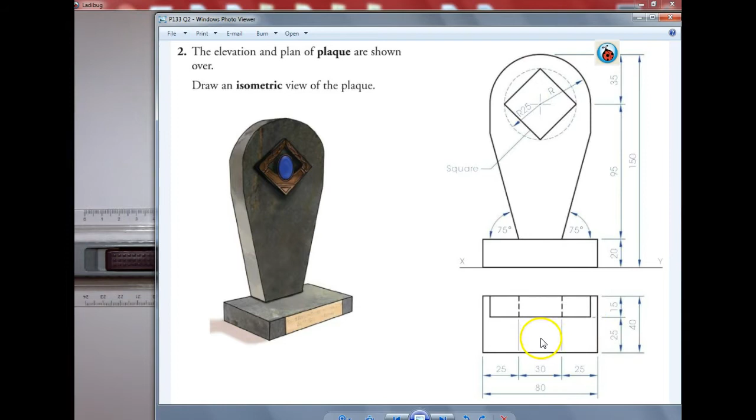Okay lads, so in this question we have a base, we're going to have an angled body then coming up, and this is going to come up to meet a semicircle, so quite a lot. So first thing I'd like you to do is I want you to draw the plan and the elevation on the left hand side of your page. This is just so we have it for measurements, and so I'm just going to make it a bit smaller.

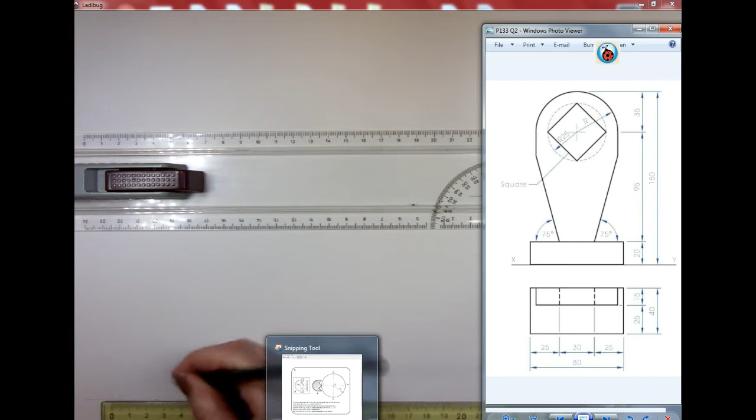So over here, start off my plan, and on my plan I have 25, 30 and 25. From each of those points we're going to go vertically up. I'm going to extend them up to the elevation because I will need them as well in the elevation. My thickness of my plan, I'm given a total of 40 and I have a 25 and a 15. So measure my 25 and my 15. From those 2 points we're going to go across. So I can darken in the outline of my plan now.

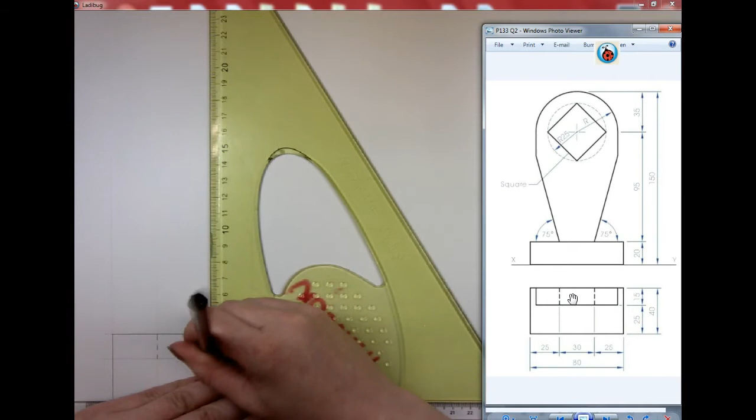Okay, now I'm not given this line here. In order to get that, I have to do my elevation, but I do have 2 hidden detail lines here. Obviously, just to recap, hidden detail means we can't see it, but it is there. Okay, so I'm going to do my XY line. Obviously, as we know, leave 1 centimeter to 2 centimeters of a gap for neatness.

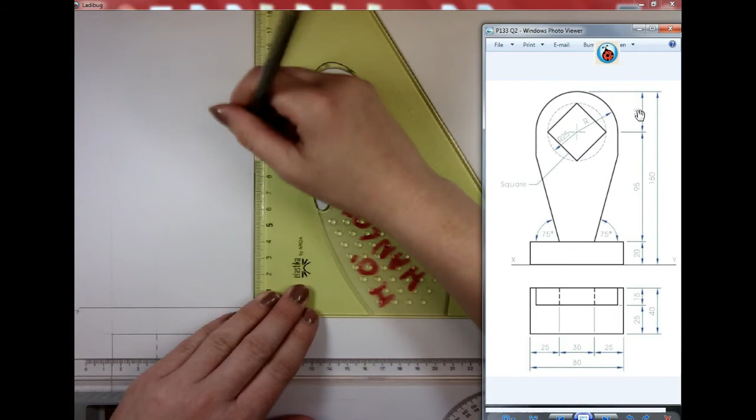And the heights I have in my elevation, I have a 20 and a 95. And I have a radius up here, which is going to be radius 35. So 20 and 95, and go horizontally across, horizontally across. For my base, I can just draw my base in lovely and dark.

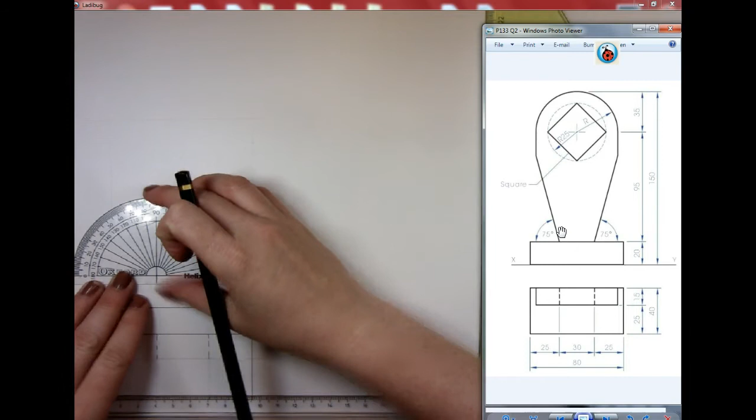And so first thing I'm told is I have an angle here of 75 degrees. Obviously, if you don't have a protractor, you can get 2 set squares, a 30 degrees and a 45 degrees, and that will give us 75. So I'm just going to line it up, 75. Once we have our dot, line it up, draw my angle. Same on the other side, we have our 75 degrees.

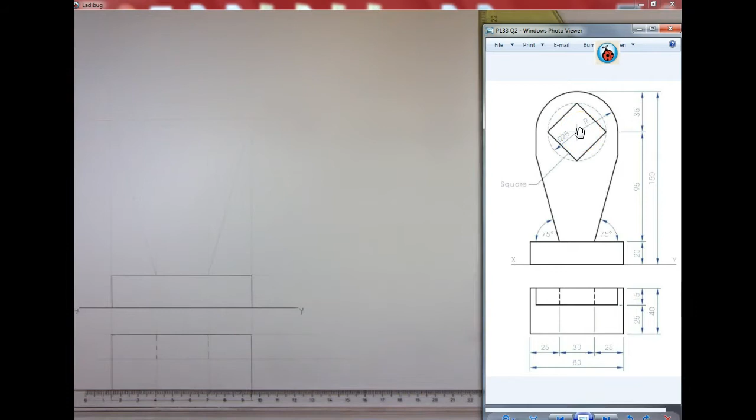Now, I'm now going to go straight up here to my radius 35 circle. My radius 35 is obviously going to be in the middle, so I'm just going to get my midpoint here and go straight up. Now, get my radius 35 on my compass, and from this point we're going to draw in my semicircle. Now, it's very important we do this bit next.

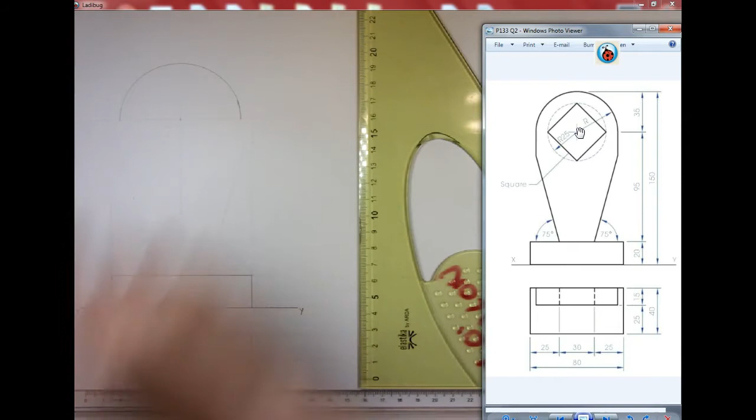Once I have this drawn, from these 2 points, I'm going to drop a vertical line straight down, and that there is the point where it cuts. Now we just draw horizontally across to show that we're in the same point. Lovely. So we can draw this nice and dark now.

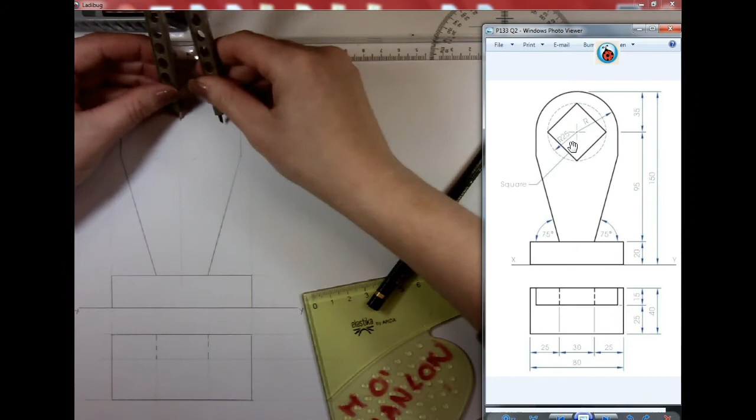Okay, next thing I need to do, lads, is using the same center point, I have a radius 25 circle. So getting my compass, I'm going to put 25 on my compass. Oh, sugar, apologies. That's, as we know, meant to be a light circle, not a dark circle, lads. So nice and light, please, because it's a construction circle. So, nice light circle, and as we see, we're going to use that for our square, which is inside it.

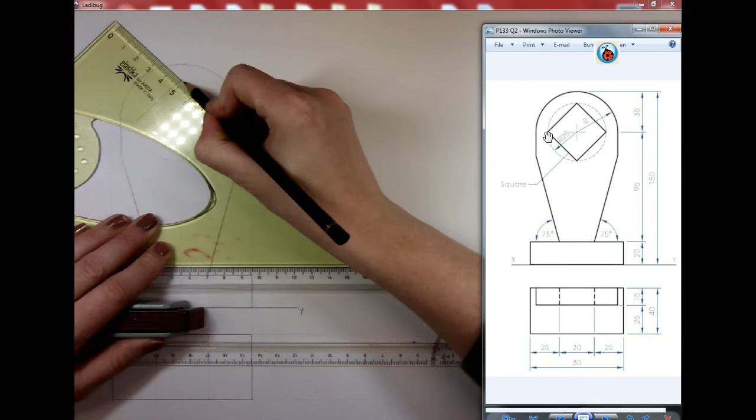So I'm just going to draw the vertical line so we can get to the top and the bottom. And using my 45 degree set square, we can draw the required square. Obviously, it's a square that's tilted at 45 degrees. Now, we just finally have to finish my elevation. My widest 2 points are these 2 points here, so we're going to bring them straight down. And same on this side, straight down. And drawing my line across. Lovely. So, we have our shape.

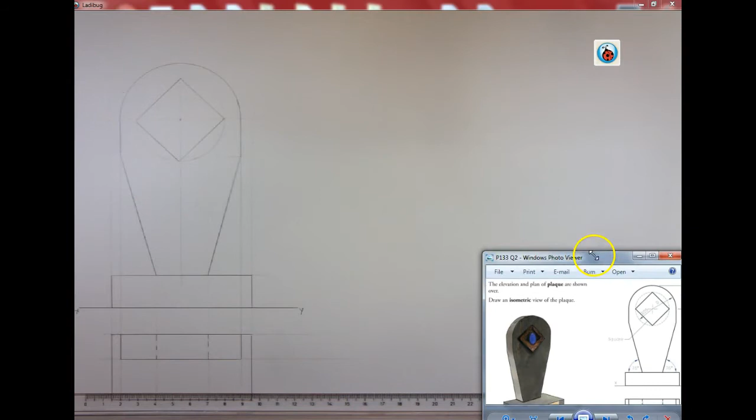The next thing we're going to do is we're going to get our 3D drawing. Now, my 3D drawing that I have to get, I'm just going to move this down here out of the way. I have a base first of all, so I'm going to start with the base there. Okay lads, so I'm going to start by constructing the base. Now, as we know from our plan, our base thickness is this thick and our width is this width. So we're going to start with our crow's foot.

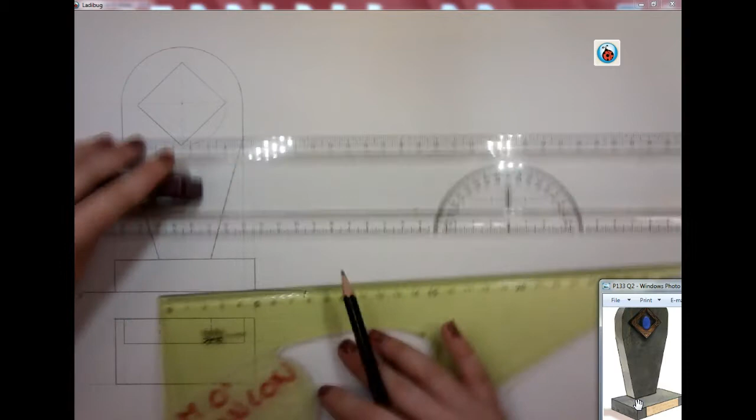So near the bottom of the page, we're going to draw our 30 degree line and a 30 degree line meeting it. And first and foremost, I'm going to get my compass, and I'm going to take my distance, my length of my plan, mark it off, and the width or thickness of my plan, and mark it off as well. So that gives me those 2 lovely points there.

Once I have those 2 points, I'm going to go back at 30 degrees, and by going back at 30 degrees, that's given me, I'm going to say, the top here, and I'm going to work downwards. In order to get the bottom part, from the 3 points here, I'm going to go down vertically. We don't need to draw a vertical line from this back corner because we won't actually see it, okay? There is a line obviously going from it, but we won't see it.

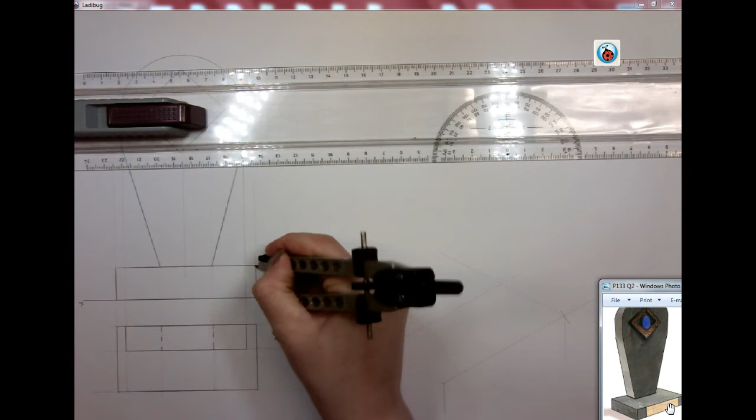My height is taken from my elevation. Mark it off. And once we have that marked off, we're going to join our dots together to get the bottom of the box there. Okay, I'm not going to darken in this yet because we don't know how much will go in dark.

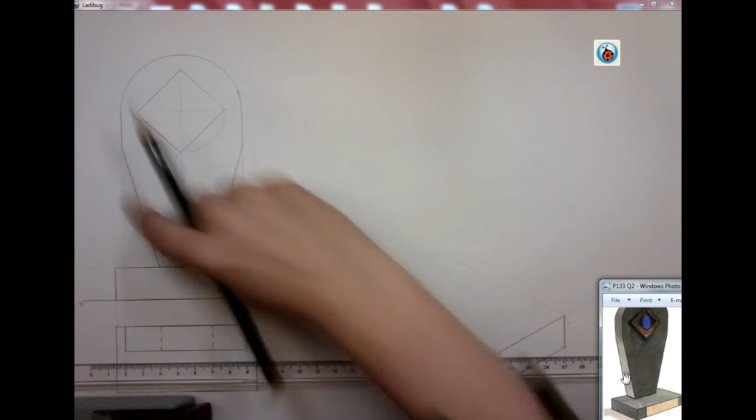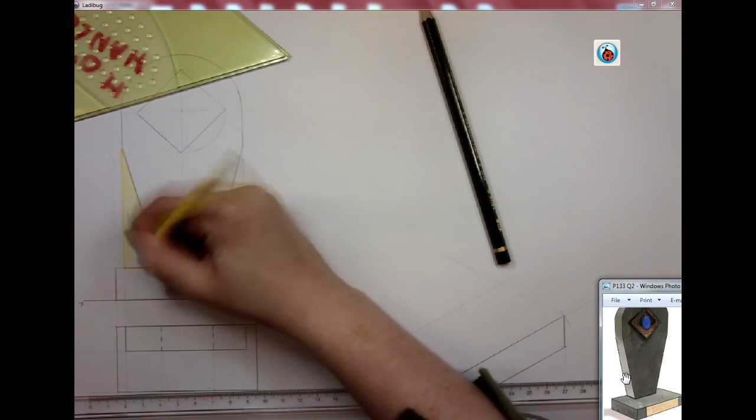Now, the next thing we have is we have an angle here. So we have to look at our angle and how we're going to solve it. So if we come up here to my elevation, I'm just going to put a triangle here where the angle is. So there's the height. That's the actual angle itself. And then we have a width here, which is that width. This is the triangle that gives us the angle. I'm just going to put a bit of colour into it here just so we can translate it over to the side view.

Now, I need to find that down here. Before I find that, I'm going to find this point. Now, it's very easy to find that point because this is the same as this. So if I take my plan and I take the distance from here to here using my compass and I mark it here, I'm going to go back at 30 degrees. And I know the length of that will be this length here. Now, what that gives me, lads, is this line, which essentially, if we look at the 3D, it's that little line that's just there, okay?

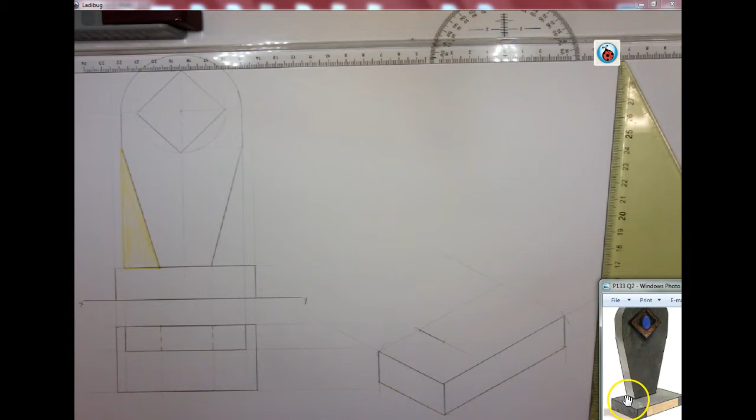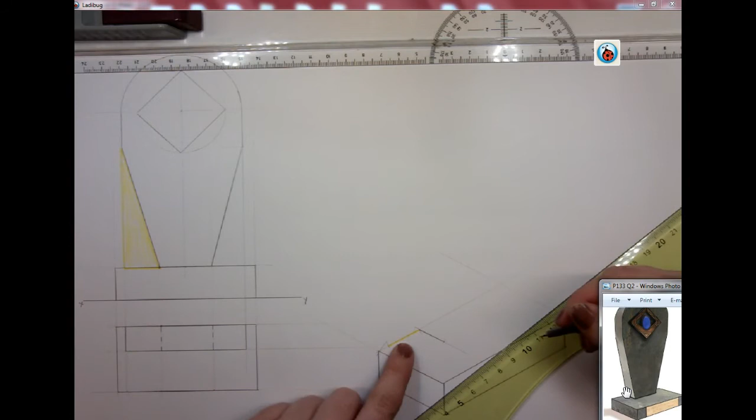So, from this point, I need to measure this distance. So, I'm going to take this distance here using my compass. So, I have that distance on my triangle, and I'm going to mark it here. And I know now that that yellow line is the same as this yellow line. As we see, the horizontal line becomes 30 degrees in isometric. From this point we have a vertical line going up. So from here we're also going to draw a vertical line going straight up.

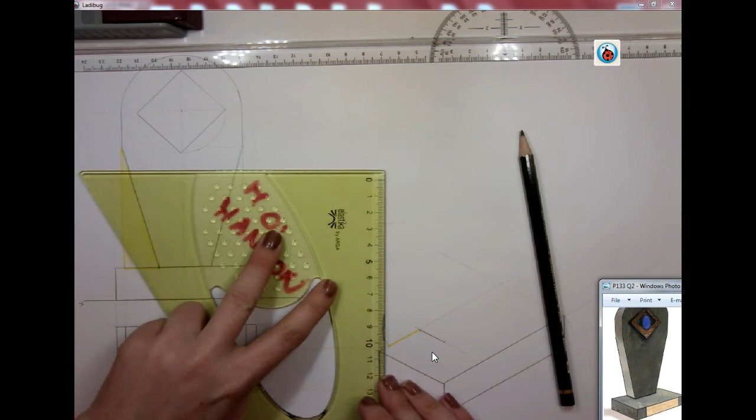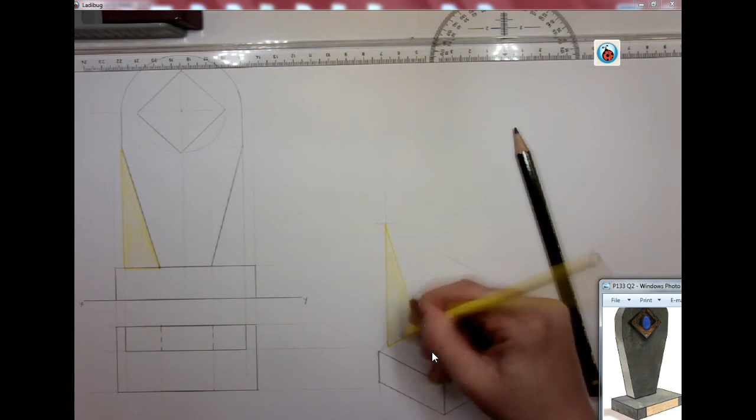Now in my elevation I can take the height of that and there's our height. Turn around here and mark it off in my 3D. So yet again we know this height is the same as this height. We're now going to join our two dots to finish my triangle. I'm just going to add a little bit of colour into that as well, just so we can highlight what we've done. So we've moved this triangle from here in my elevation to here in my isometric 3D. I've taken the width here of my plan, it's there, and I've taken the height I've measured there.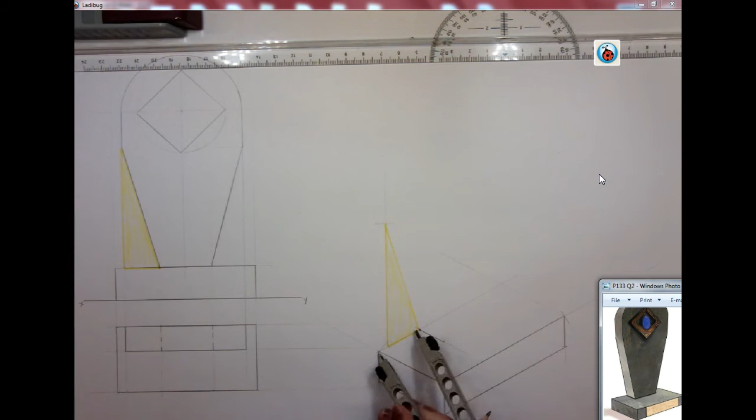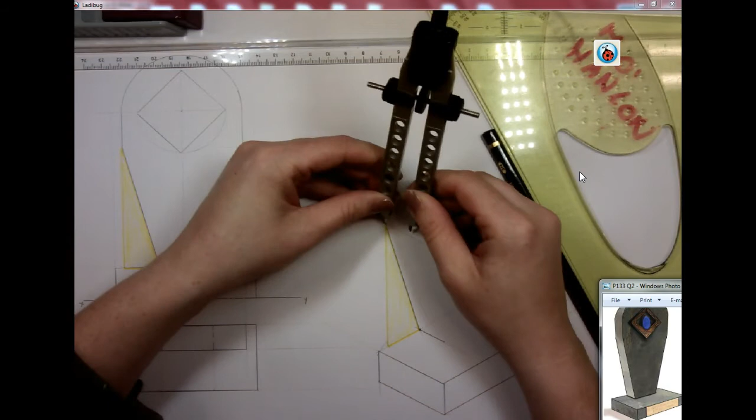To recap on this point, in order to get that point in my plan, I took the distance and I marked it off just from here to here. Okay, I now have the side. So once I have that side, I can darken it in. I now want to make that 3D, so I'm just going to come back at 30 degrees, get my thickness, and mark it off. Now obviously some of you are going to be asking, could you use sliding set squares here? Of course you can.

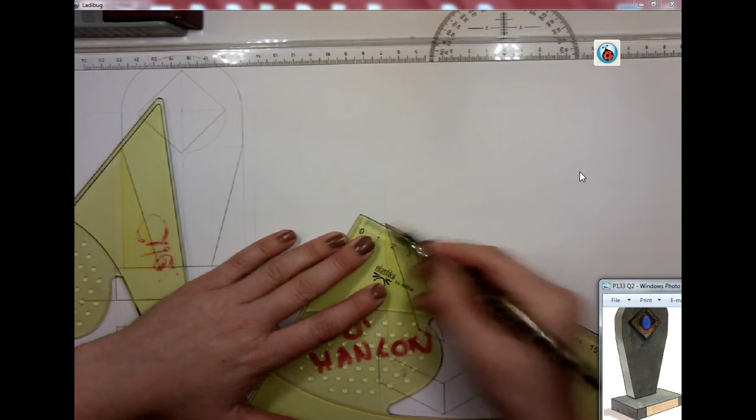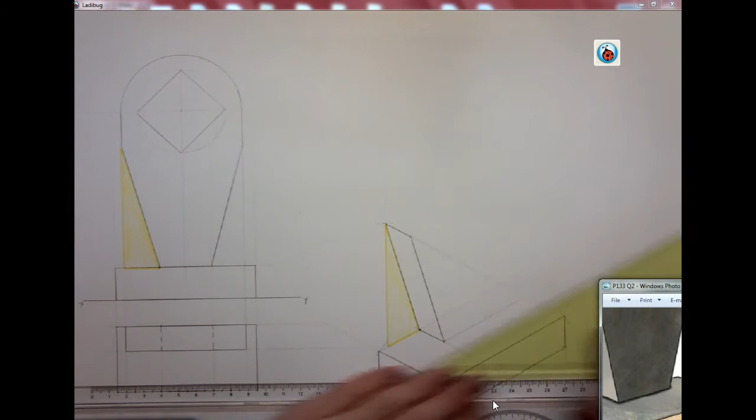So just to show you that it works, if we line up our two set squares, slide them, that will give us that line because these have to be parallel. This can give us a lovely dark line there as well. And now that gives us that shape, which is fantastic. The next thing I'm going to get is this line just here, this bit. So I'm going to go 30 degrees back this way. I'm going to get my set square, get my compass and get the width of that base. Mark it off here. And that, lads, gives me the base of that, which is lovely.

Now, oops, this is after zooming out. I need to find the corresponding point up here, which is essentially this point. If you want, you can go away and you can draw the exact same triangle over here, but there's an easier method. From this point, if I go back at 30 degrees, in my elevation, if I get the width of that line, so I'm getting the length of that line, in my 3D shape, when I swing an arc, that gives me the point. And all I have to do then is line it up with my set square back to where I got that point.

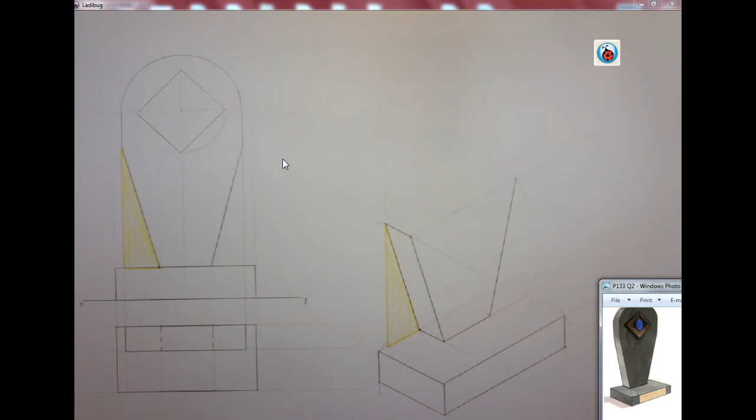There's my angle. So that now is giving me that body there, which is fantastic. The next thing I'm going to get is the two vertical lines go straight up. So from the points we're going to measure up my height. And we're taking this from the elevation. So there's my height in the elevation.

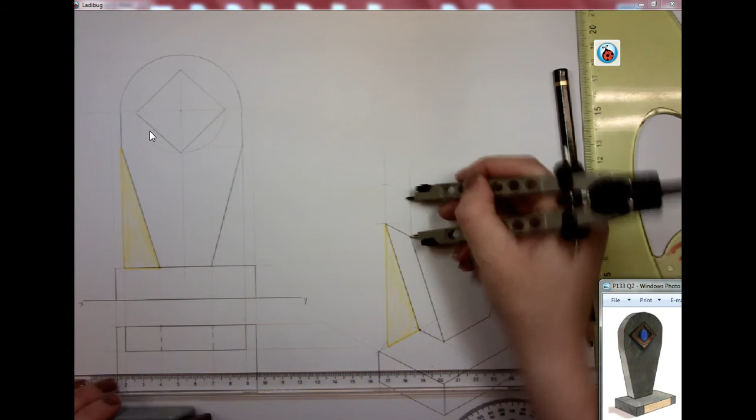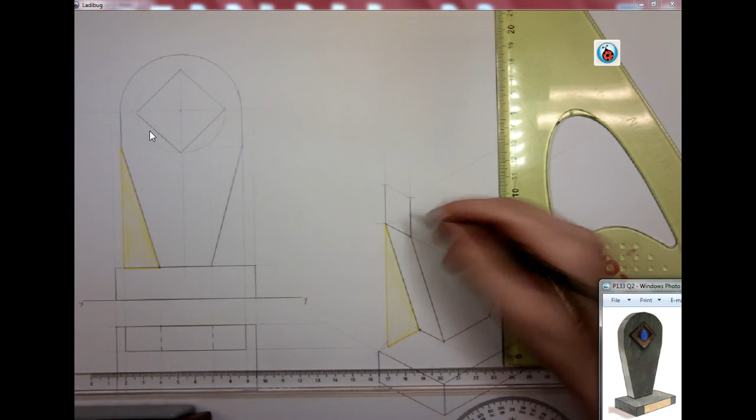Now just so we can draw in the line, draw that in. You won't have a dark line here. When you have a semicircle meeting a vertical plane, you don't have a line. However, when you have two angled planes meeting, or two angled surfaces, you do have a line. So lads, we have all of that there now, which is lovely.

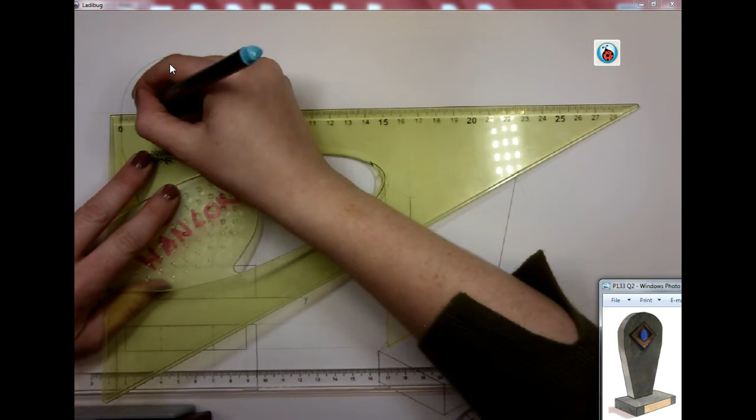Okay, so now lads, I need to get my freehand curve up here, okay? So I'm going to look at my semicircle. When I look at my semicircle up here, what I am getting is I have a distance of 70. Now, I'm going to go in tens, just for handiness, like so. But there is one thing I want to draw your attention to. The middle or the center point is at 35. You have to get the middle point as well, because that's going to be the highest point.

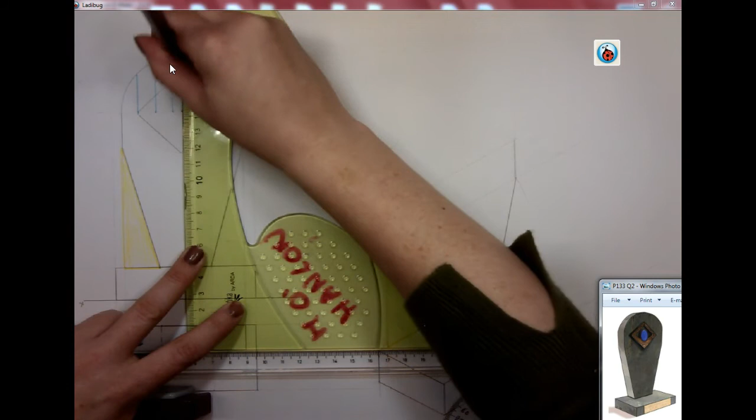From each of them, I'm just going to draw a lovely vertical line. Now, I'm putting these in colour just to highlight them on the page. I would encourage you for the first few drawings to put them in colour, but in an exam situation, unless colour is helping you to do the question, there is no need for colour. So, those points we're going to divide down here as well. So we have a 10, 10, 10, a 5, 10, and 10.

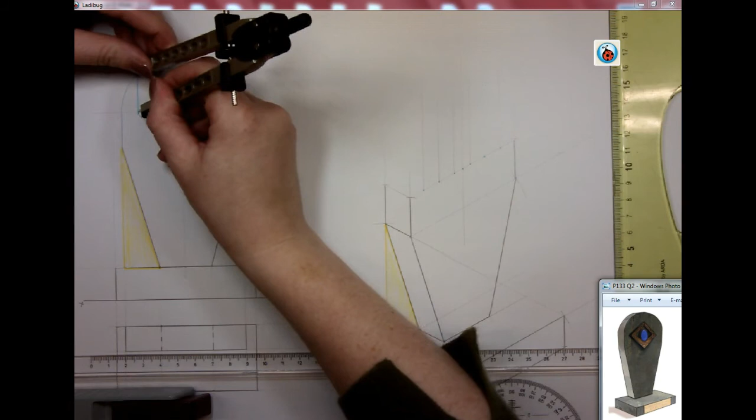Now I'm not going to put in colour yet. From each of those points we're going to go straight up. From this point I'm going to go straight down, because you'll see in a moment it's going to help give us another point. And now I'm going to take my compass and I'm going to take my distances from my elevation. Now, as you'll see, I've divided this symmetrically, so the 2 points on the right and the left are the same, so I can mark them as follows.

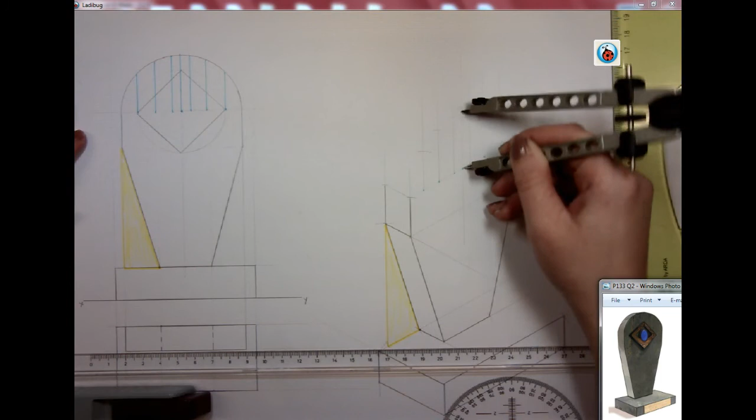My next height then will be this fella. Mark it off here, mark it off here. Third height, yeah, again the same. So as you can see, lads, there's a bit of a handy, and you have to get this high point. Very important to get that center. Once you have all those points, we're just going to literally join the dots together. And that's going to give us a lovely freehand curve.

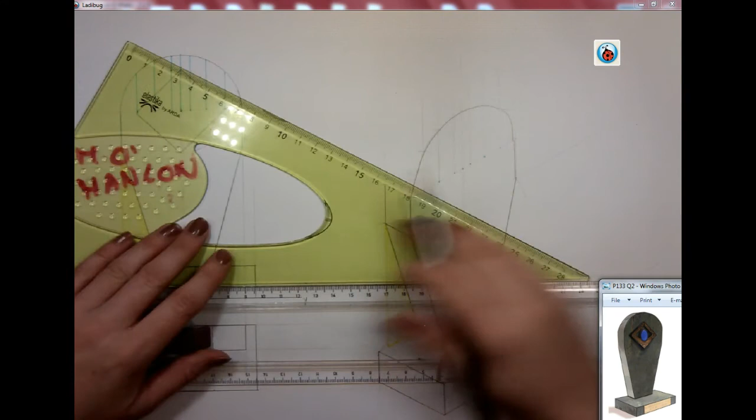Now, in order to make this 3D, you could obviously do all the construction again at the back, but there's an easier way. From every point, we're going to go back at 30 degrees. Lovely. And we're going to get the thickness. Now we can get our thickness here, which obviously is the same as this thickness in a plan. And we're just going to measure it off from each point.

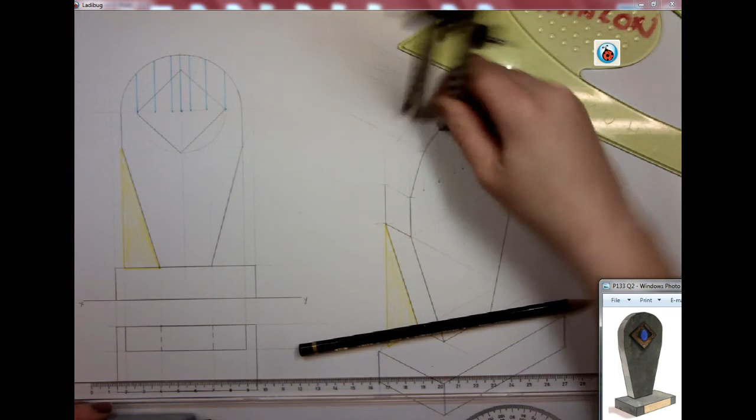Now obviously once we have these points as well, we're going to join them by a freehand curve. Nice and neatly. I always prefer going nice and neat first, just so you have a path to follow then. And then we're going to line up our 30 degree set square to get our edge like so. Now we're not quite finished. We still have to get the diamond shape in the front.

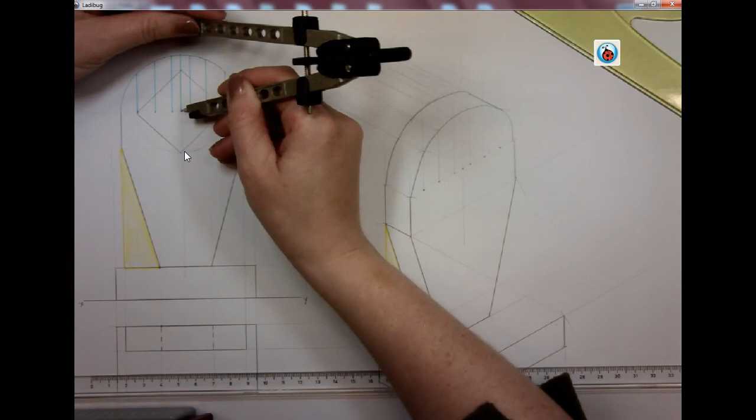Now the diamond shape touches this point here and this point here. So that gives us a point here and a point here. Yeah, again lads, don't do big dots in yours. I'm just highlighting it. We have a point here on the top here and a point here on the bottom. So we're going to get our compass and we're going to measure from the middle there and there. And once we have that done, all we have to do is get our set square.

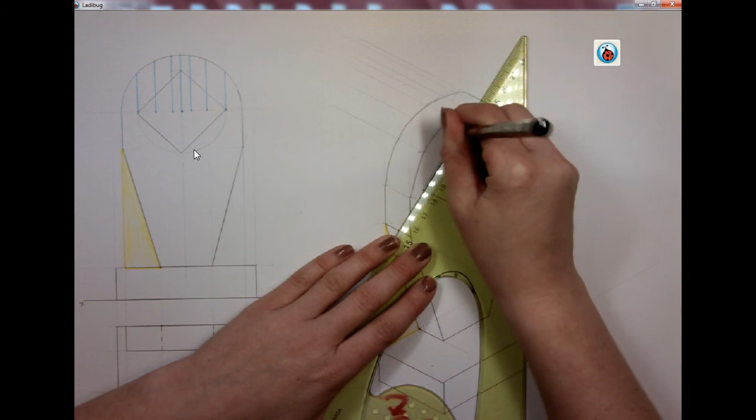Line them up. It will look like more of a parallelogram, but that's because it's 3D. Now I can obviously darken in this little bit down here in the bottom. And that, lads, is my 3D shape completely finished.

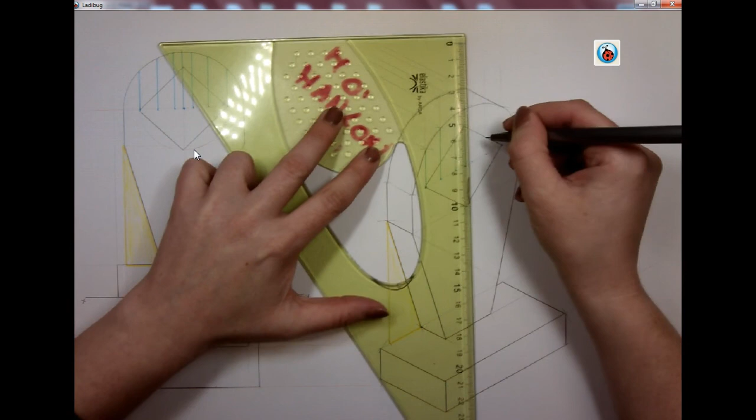Hopefully, I'm just going to highlight over here these blue lines. They obviously came from my division of a circle. You do not have to use 10 mil for dividing your circle. However, it's a nice easy number. The more points you divide your circle into, the more accurate your freehand curve is going to be. Alright, so